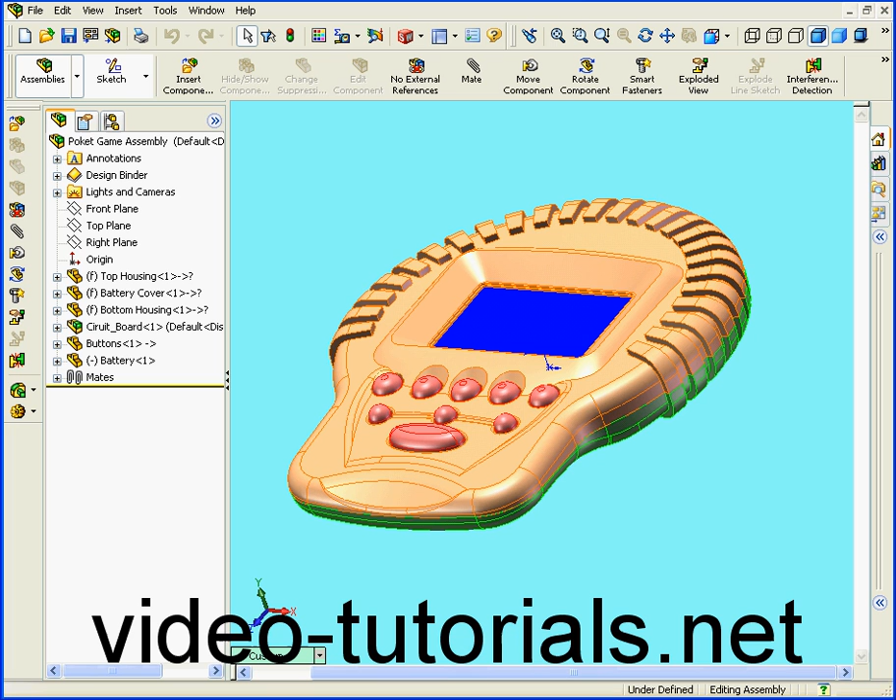Welcome to the final segment of our Pocket Game project. In this tutorial, we'll be finishing the LCD opening.

Let's right-click on the top housing and select Edit Part. Let's expand the specification tree.

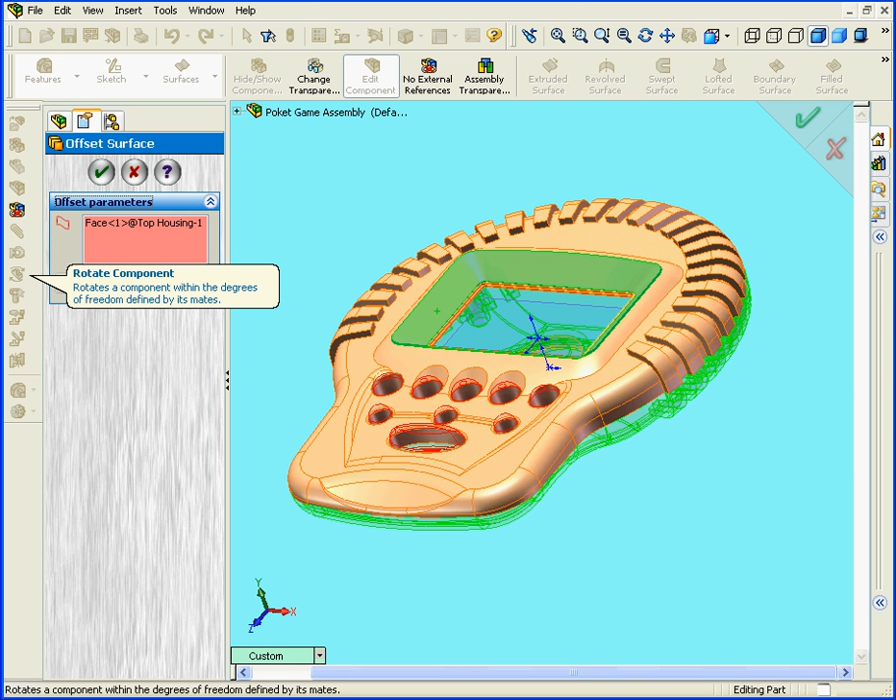Next, I'm going to offset this surface by 0.5 millimeters. Tab. Let's reverse the direction also. Click OK.

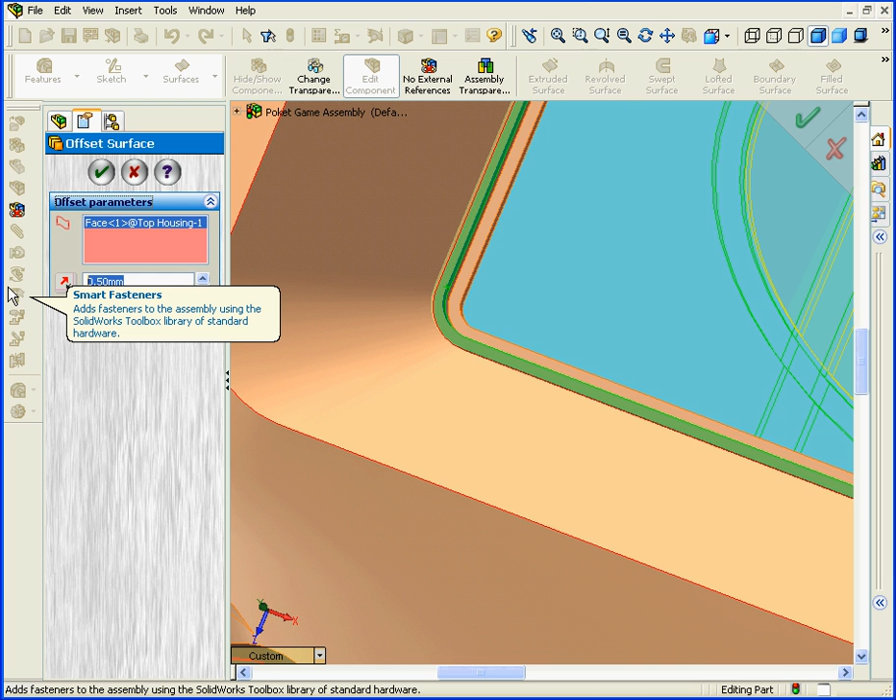Let's offset another surface now. Activate the Offset tool. There's something pre-selected here. Let's delete it. Let's select the surface we want. We'll enter a 0 offset distance value. Tab. And click OK.

Alright, let's hide our solid body. Expand the solid bodies folder, right-click, and hide.

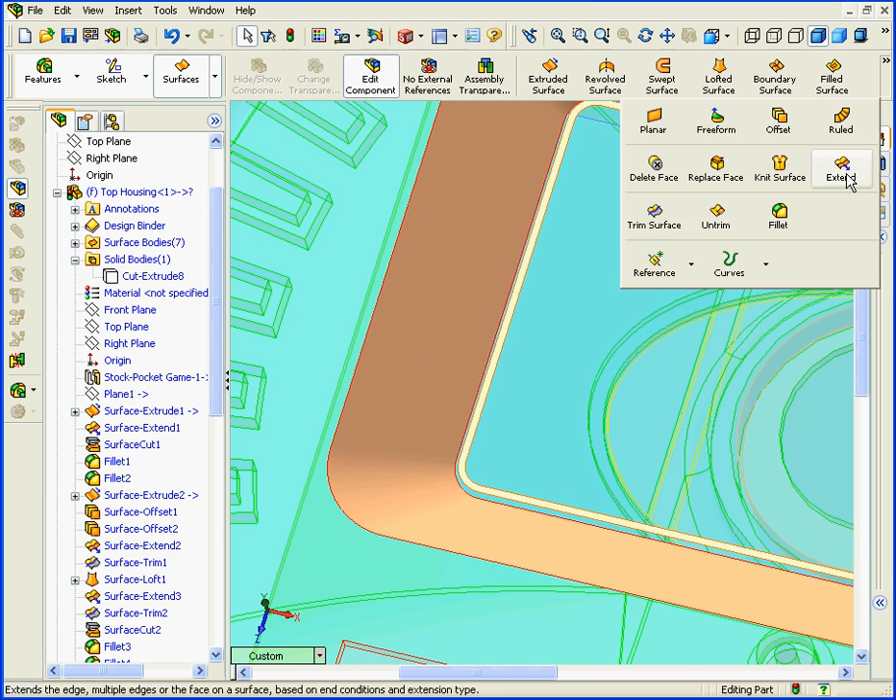Next, we'll need to extend this surface. Activate the Extend tool. Click on this edge. Under End Condition, choose Up to Surface. Now we select the surface to which we'll extend.

And click OK. Next, let's activate the Planar tool and create a planar surface right here. Click OK.

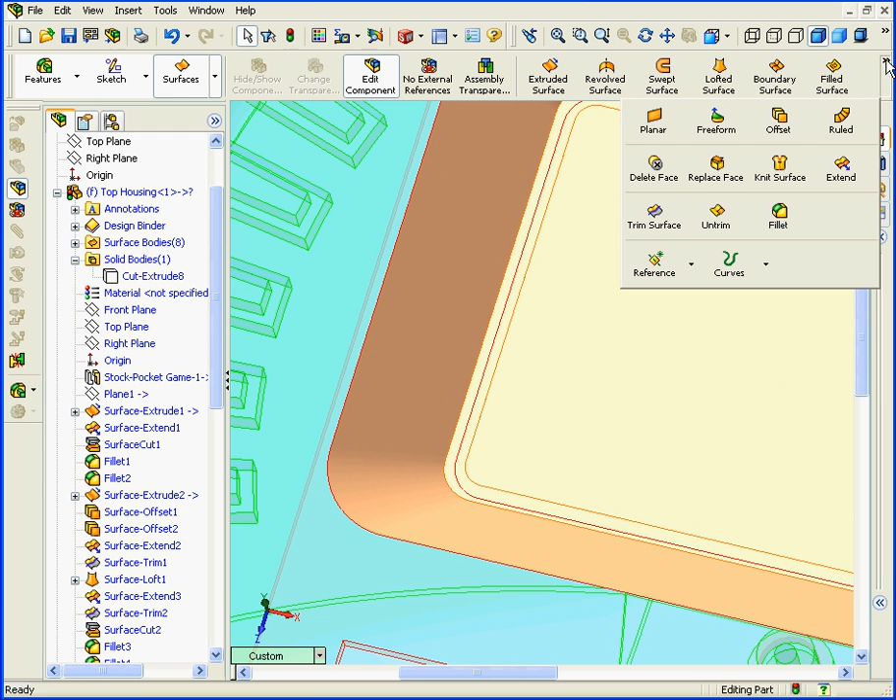Now we'll activate the Knit Surface tool, and we'll knit these two surfaces together.

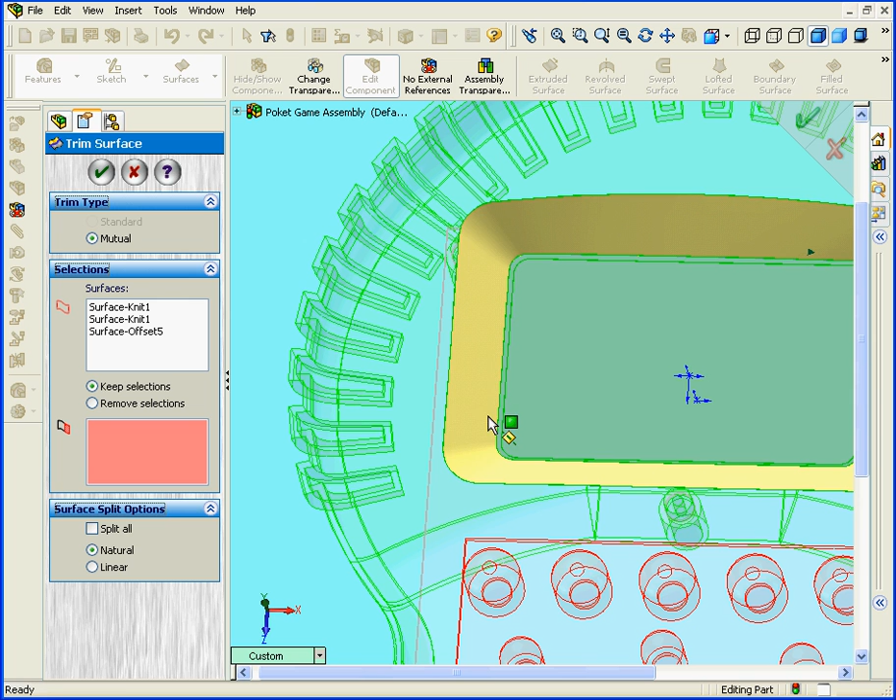Finally, I'm going to activate the Trim Surface tool. Let's select the Mutual Trim type. Let's select these surfaces. In the Keep Selection area, let's keep this surface and click OK.

OK, let's zoom out. Next, let's insert a plane that's parallel to the top plane. Select Top. We're going to offset the plane by 12 millimeters. Let's check to make sure it goes in the right direction, and click OK.

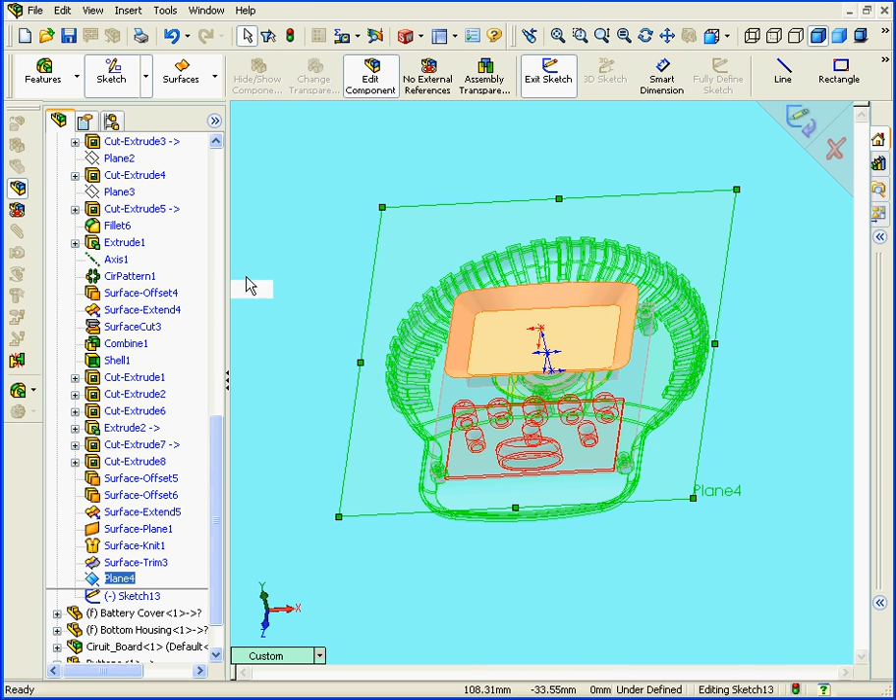Now let's right-click on our new plane and insert a sketch. We'll take a top view.

Next, let's activate the Rectangle tool. Right-click and select.

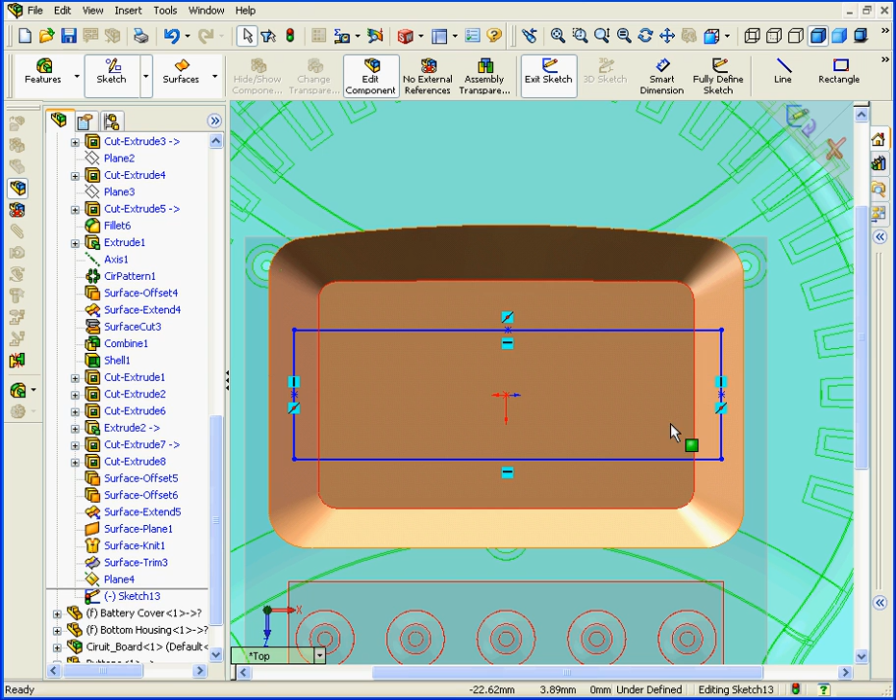Activate the Point tool. We'll insert points here, here, here, and right-click and select. Now Shift-select this point, and add a vertical relationship.

Shift-select this point, and add a horizontal relationship. Oops, I pressed vertical by mistake. We'll need to delete that. And let's add a horizontal relationship. And click OK.

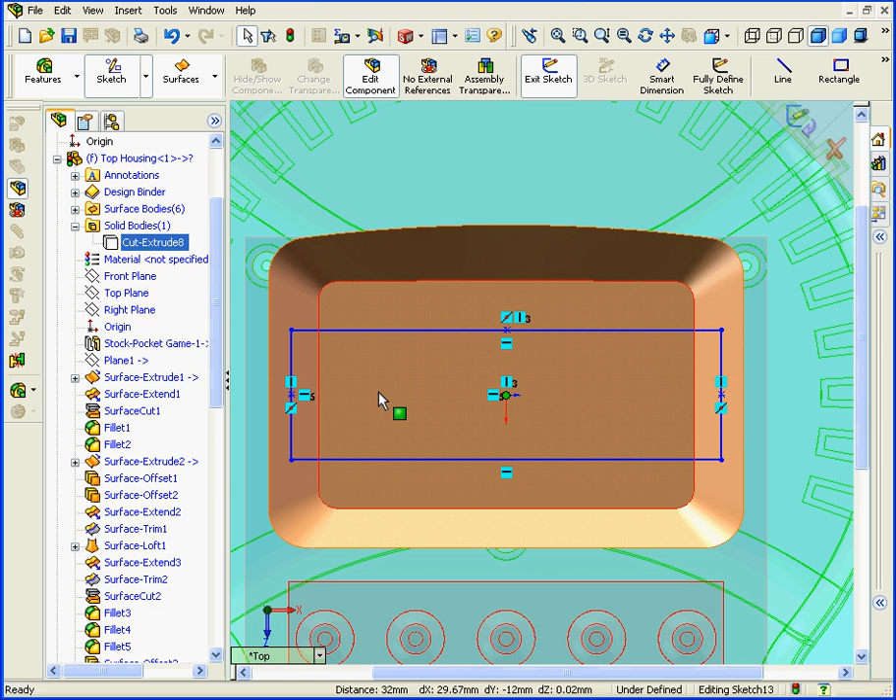Now we'll activate the Line tool to connect these 2 points. Right-click, select.

Let's Smart Dimension. 60 millimeters here. OK. Here, let's enter a value of 16 millimeters. OK. And OK.

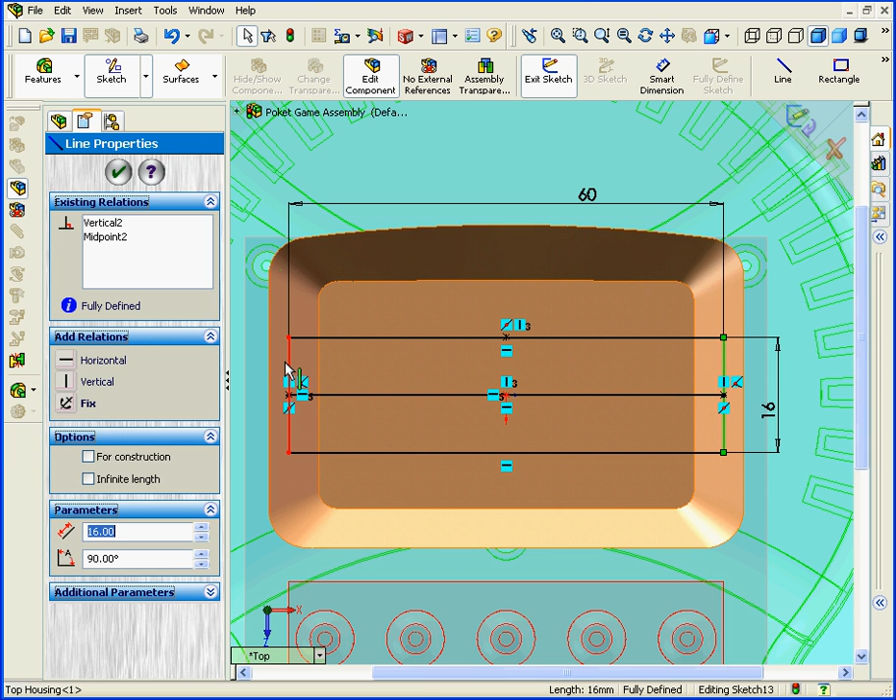Now let's Shift-select these 2 lines and convert them to construction geometry. Next, I'll Shift-select these 3 lines and activate Offset Entities.

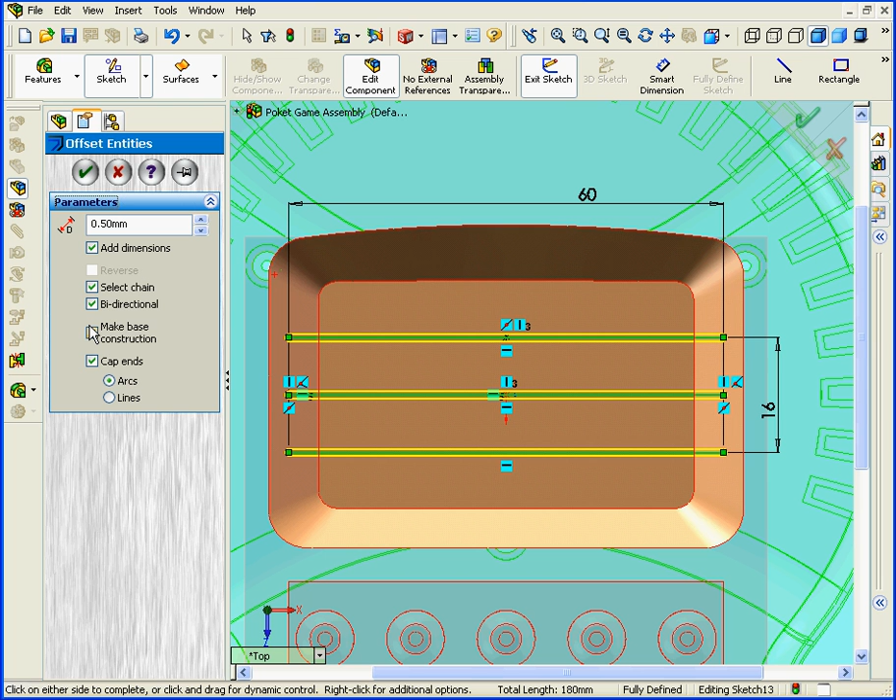Offset distance, let's enter a value of 0.5 millimeters. Tab. Let's keep the Cap Ends checkbox and the Make Base Construction checkboxes checked. Click OK.

Now let's bring back our solid bodies. Right-click and Show.

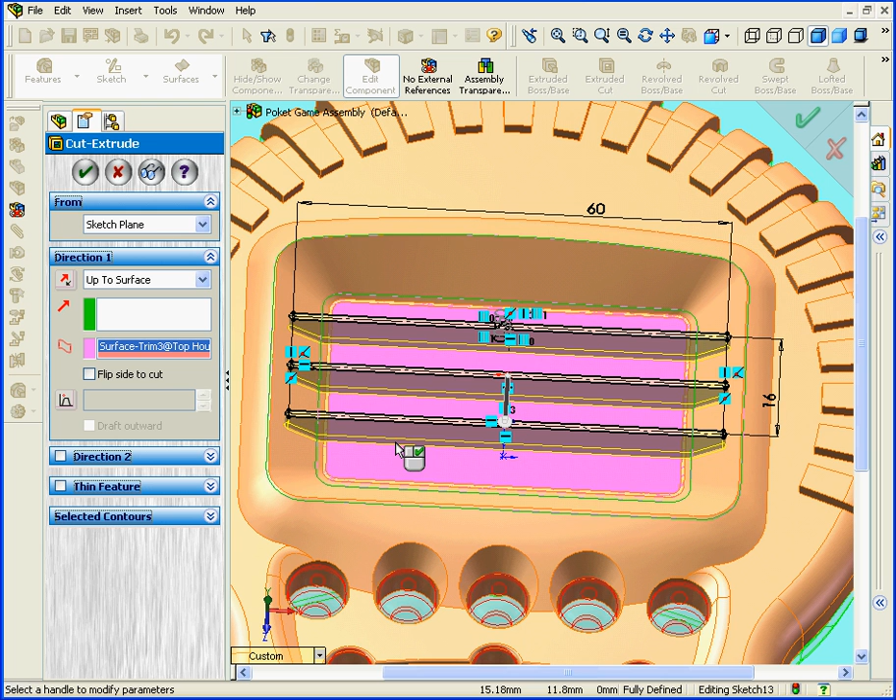Next, we'll make an extruded cut. Let's activate the Extruded Cut tool. From the End Condition drop-down menu, let's choose Up to Surface. And in our surface selection area, we'll select this surface. Click OK.

Let's hide this surface. Right-click and hide.

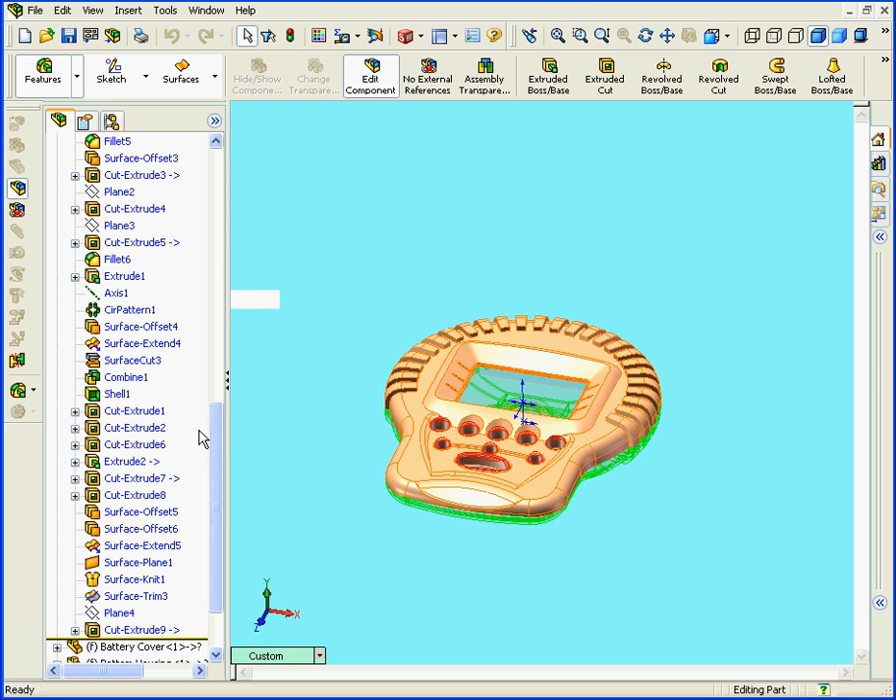Okay, let's rebuild our assembly. And let's hide this plane. Right-click and hide. Let's edit the assembly. Right-click, Edit Assembly.

Okay, it looks good. And this completes our Pocket Game project. We hope you've enjoyed this practical application of SolidWorks to a real-life project.